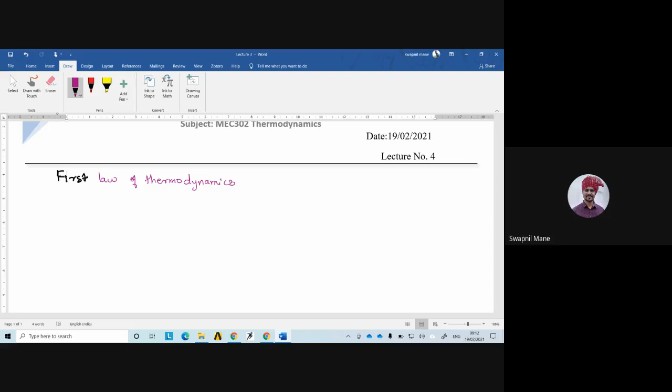So today's lecture outline will be to introduce the first law of thermodynamics. When we say first law of thermodynamics, it is applied to two systems. First is the closed system, and the other is the open system.

In order to understand the closed system and open system, we will first see what a closed system is. We discussed in the last class that a closed system will have a system boundary, and energy can go in, energy can go out, but mass cannot go in and out.

So mass in, mass. Sir, some students are waiting out. Okay, okay, 1 minute.

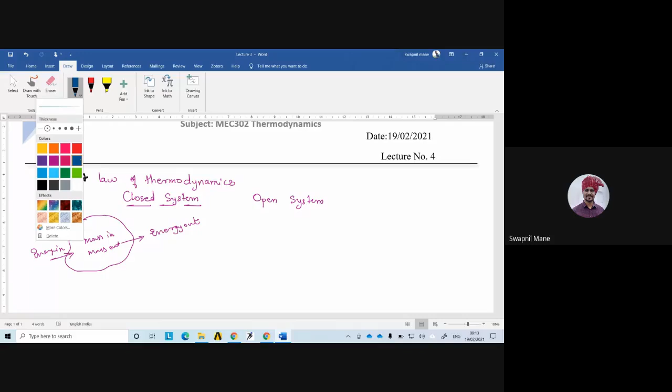So there is a restriction for mass in and mass out, and that is called a closed system, right? This was covered in the previous class. So what we will now do is first understand how the first law is applied to the non-flow system. You must understand a closed system is nothing but a non-flow system. What is a non-flow system, by the way?

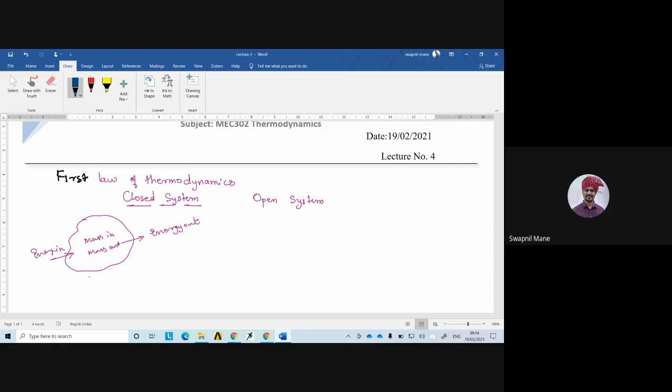A flow system means some fluid particle is going into the system, and the same amount of fluid will come out of the system. This is called an open system, or we can say flow system. So this happens for fluids.

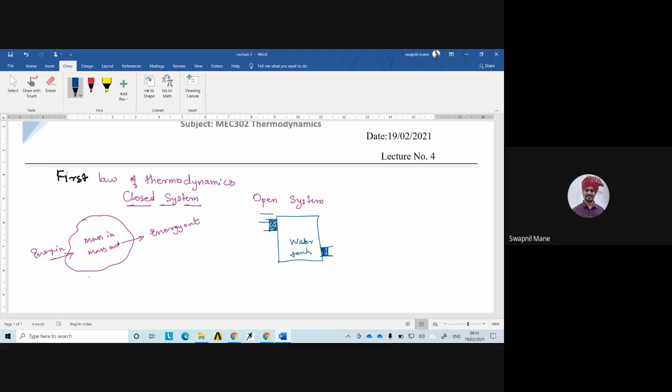So here the transaction of energy will take place, and of mass also. This is the mass particle going into the system, and the same amount of mass is going out of the system. It is the same example of a water tank, in which the fluid can go inside and outside; that will become an open system. But now we are talking about the first law applied to a closed system, or we can say non-flow system.

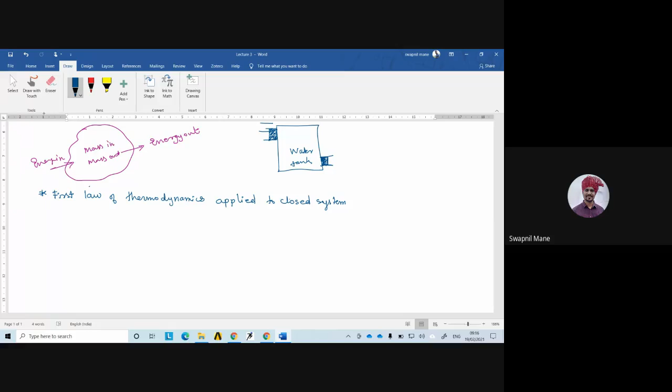So what the first law says is that the algebraic sum of heat transfer is the same as the algebraic sum of work transfer. But because it is undergoing a cycle, we can say that the algebraic sum of heat transfer in a cycle is equal to the algebraic sum of work transfer undergoing a cycle.

Or in other words, the cyclic integral of change in heat is equal to the cyclic integral of change in work. Please remember all these terms because these are very important in your entire lifetime. So this is the first law of thermodynamics applied to a closed system undergoing a cycle.

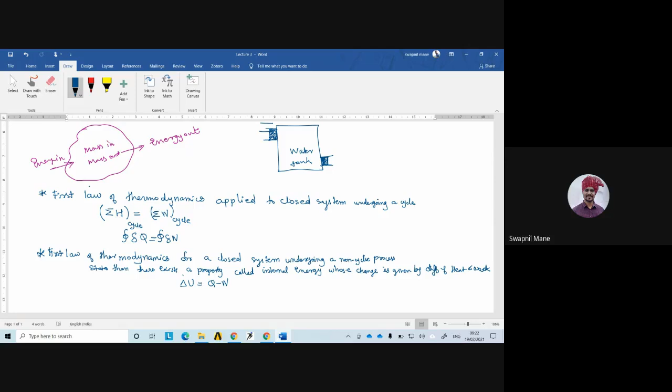Okay, this is clear. So if the first law is applied to a closed system for a non-cyclic process, then there is a property we call internal energy, whose change is given by the difference of heat and work. So just keep in mind that if it is a closed system undergoing a cycle, then the cyclic integral of heat is equal to the cyclic integral of work. And if it is not undergoing a cycle, then the change of internal energy is equal to Q minus W.

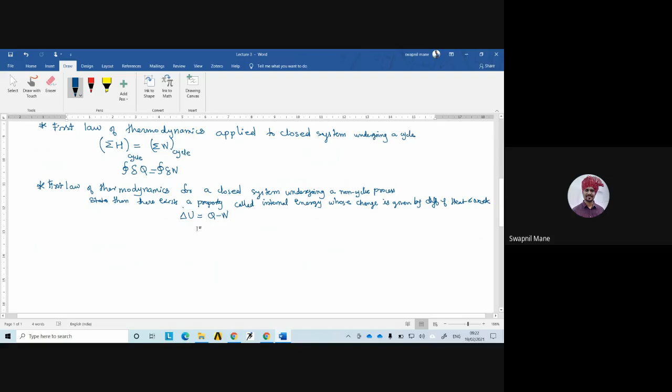So here this parameter will give you an overview of the answer to the question why providing heat will not make the wheel rotate. Why? Because this heat is getting converted to a change in internal energy. So the internal energy structure of the material will get changed, the property will get changed, and it will not result in any amount of work. You got the idea? Because it is not undergoing a cycle.

If I heat the water, its internal energy changes. Because of that, the molecules gain energy and convert into steam. But steam, if I condense, that means if I remove that internal energy, I can again get water. So that is a cyclic process. So if I keep some piston on that hot water, when the steam is generated, the piston will do some work. So heat is getting converted into work, and some change of internal energy will take place.

But if it is going on in a cycle, then we can get a negative amount of internal energy also, which is rejected, and then we can get back the heat from that steam. Means if I remove the heat from the steam, it will again get condensed. That is called a cyclic process. You understood this? Please say yes or no.

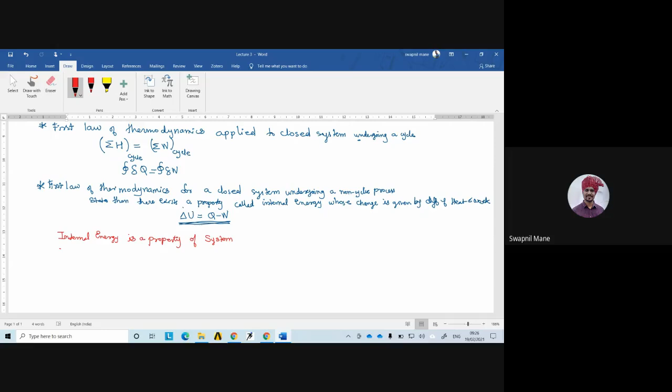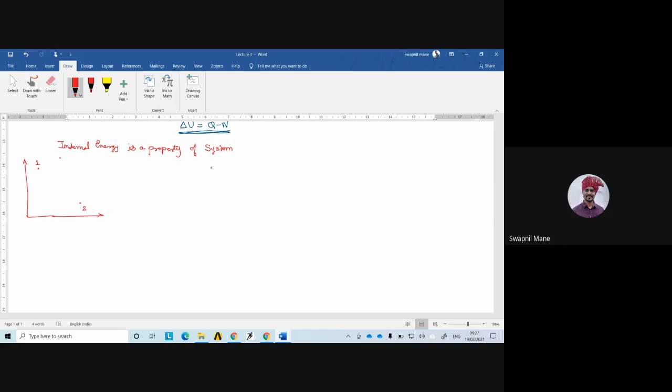Consider a system undergoing a change of state; it will have some path. Imagine we have a coordinate system defined by properties, which are ordinates that define the state of the system. Yes or no? Imagine the ordinates are defined by states 1 to 2 and it is undergoing a change of state. This is the path from 1 to 2. Let us call this path A.

Now, is 1 to 2 a cyclic process or non-cyclic process? Non-cyclic, sir. Correct, very good. Now, if it returns to the original position by a different path, path B, together path A and path B, is it a cyclic process? Cyclic. Very good. Why? Because initial and final states are same. So together A and B become a thermodynamic cyclic process.

So we can now write, let us consider, applying the first law of thermodynamics.

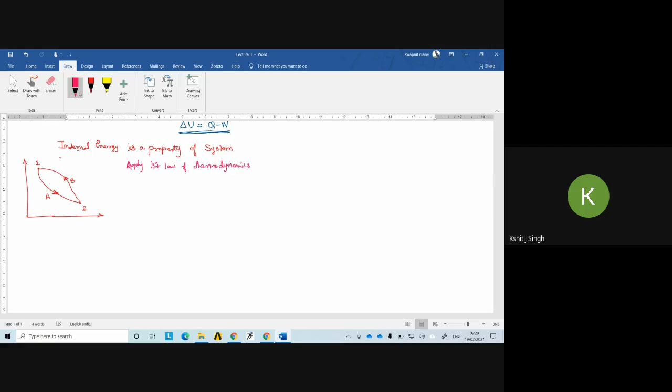Sir, students are waiting outside. Oh, they are joining too late actually.

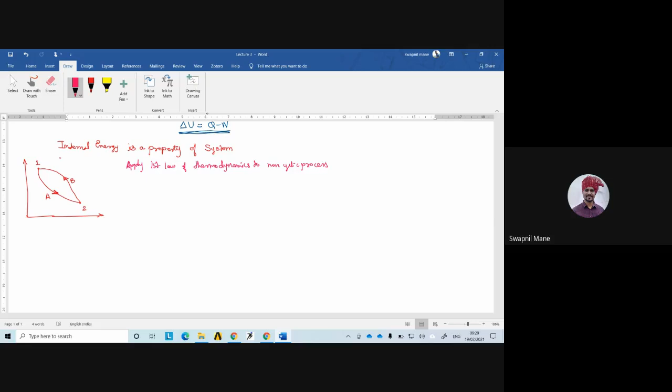Okay, so first apply the first law of thermodynamics to the non-cyclic process for path A. What will be the non-cyclic relation? Can anybody recall? Del U is equal to Q minus W. Correct. Change of internal energy of A is equal to Q of A minus W of A. Similarly for path B, change of internal energy of B is equal to Q of B minus W of B. Is it okay? Yes, sir.

Now, A and B together form a cycle. So the first law applied to a cycle: summation of Q for the cycle equals summation of work for the cycle. So Q of A plus Q of B equals WA plus WB. Rearranging, QA minus WA equals minus of QB minus WB. Yes or no? So del U of A is equal to minus del U of B.

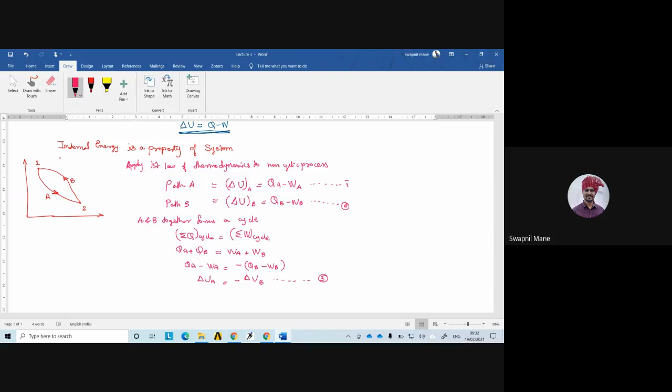Sir, why QA plus QB? A and B together form a cycle, right? When we apply the first law to a cycle, summation of all heat equals summation of all work. Now summation of all heat for this cycle will be heat supplied by A and heat supplied by B.

So it will be QA plus QB. Also summation of work means work done by A plus work done by B. And then we are rearranging the term: QA minus WA is equal to minus sign outside. So QB will go this side. So minus of QB minus WB, like that. Is it okay? Yes, sir. Is it okay?

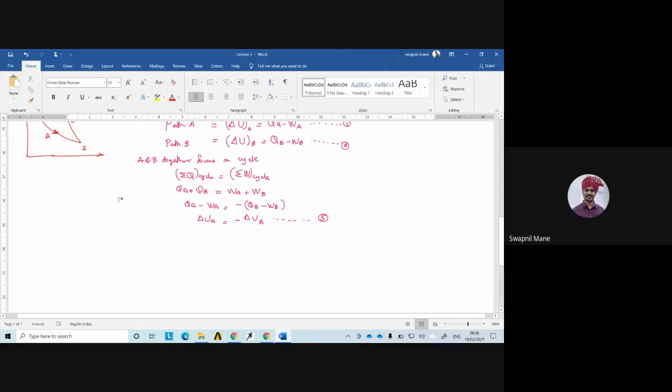Okay, so moving further, let us imagine that this is path A, this is path B. Now let us imagine that my path 1 to 2 is returned by another path, that is path C. So 1 to 2 is done by path A, it is returned by path B. We found this relation. If it is returned by path C, one minute, one minute.

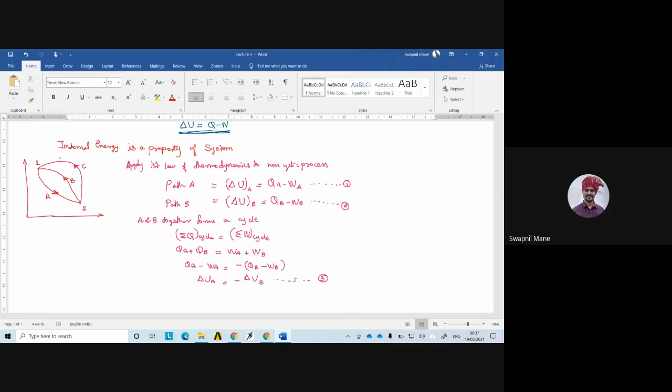Okay, so if it is returning by path C, then what will happen? Can anybody tell me what will be the expression if I do the similar thing, that A and C together form a cycle? Then summation of Q of the cycle will be equal to summation of W of the cycle, right? So QA plus QC will be equal to WA plus WC, isn't it? And what will be my final expression?

So we will write: if the system is allowed to return from state 2 to 1 by path C instead of B, then what will happen? Delta U of A will be equal to minus delta U of C, isn't it? Is it okay?

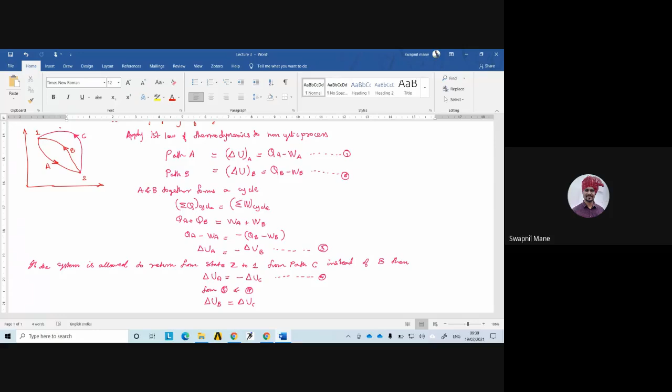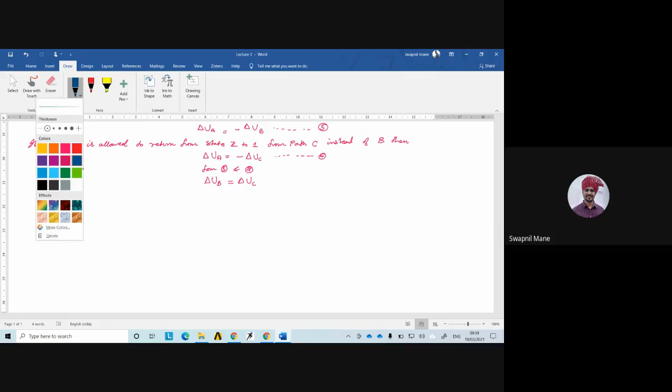Yes, sir. Then what can we predict now from 3 and 4? From 3 and 4, we can say delta U of B is equal to delta U of C. Okay. Then what does this show? This shows that the change of internal energy is independent of path.

Independent of path, and it depends upon only end states. So if a parameter depends upon only end states and is not dependent upon the path, it is called a point function. The property which depends upon only end conditions is called a point function, and that is why it is also a property of system.

Hence, it is a property of system. Right?

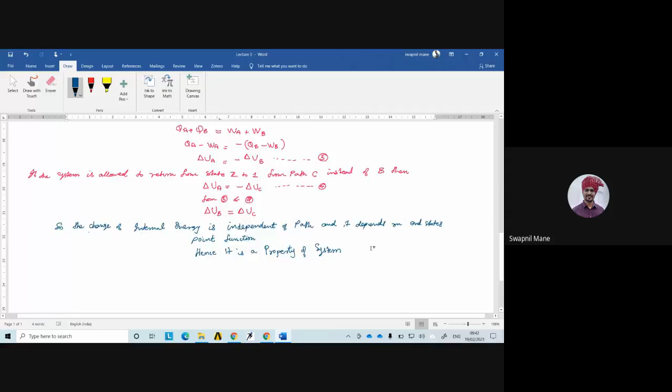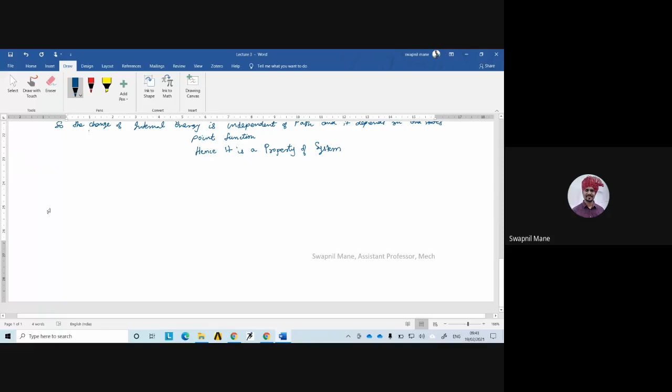Okay, so now what we will do is we will move further, and then we will start with the different thermodynamic properties, thermodynamic processes actually, for a non-flow system. So what is non-flow? Closed system. Is it okay?

In that, the first part will be constant volume process. It is also called isochoric process or isometric process. Right? In some books it is also called PV relations, or we can say PVT relations. So we will now start with this.

How to show the PV diagram for this? PV diagram means what? It is a P versus V diagram. Is it okay?

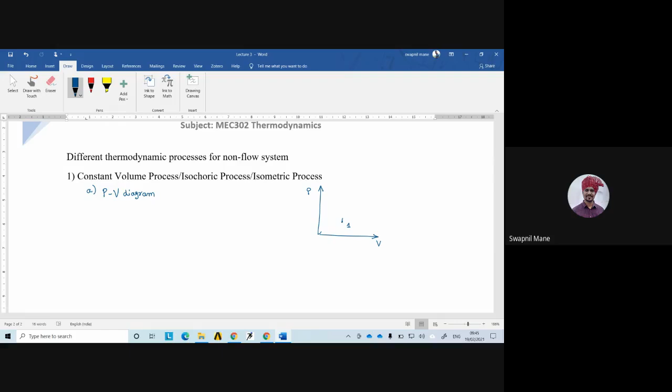So this first is the state of the system. So what will be the other state for a constant volume process? Will it be a horizontal line, vertical line, or inclined line? Sir, vertical line. Correct, vertical. So it is a vertical line, and this will be my point number 2. So this is constant volume process from 1 to 2.

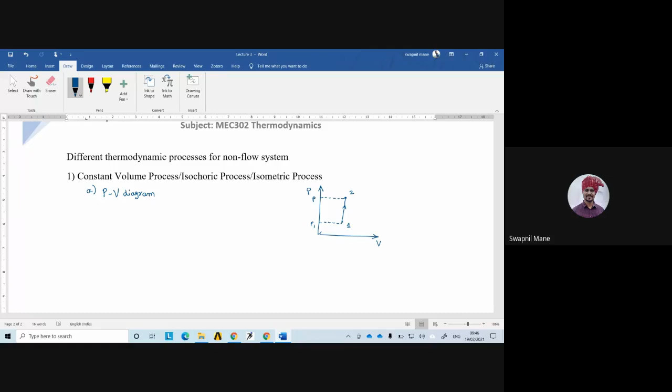So what is changing now in constant volume process? Volume will remain same because it is constant volume. So only pressure will change from P1 to P2. Yes or no? Yes, sir.

Right, now part B. What is the PVT relation? You know that universally we write P1V1 by T1 is equal to P2V2 by T2. Yes or no? So if the volume is same, V1 and V2 are same, then we can write P1 by T1 is equal to P2 by T2.

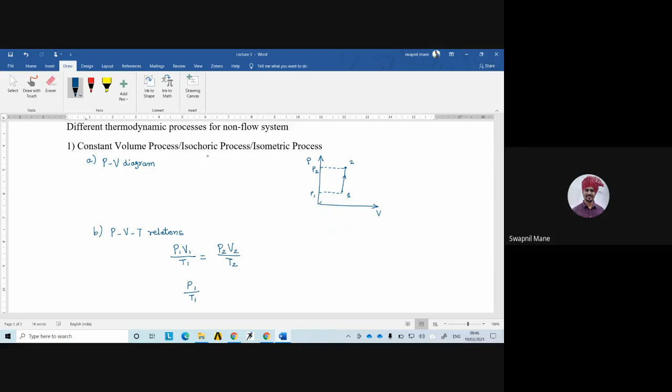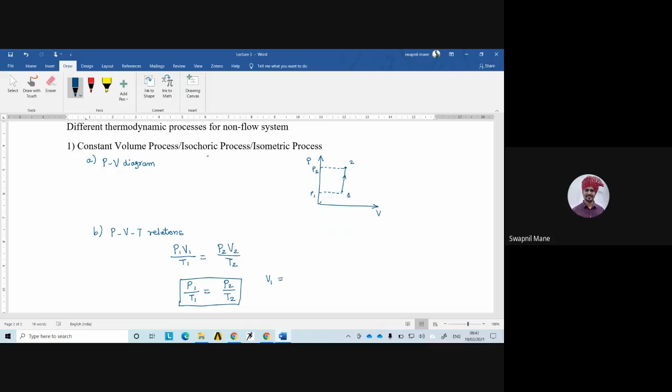Yes or no? So if there is a constant volume process, then we get this relation: P1 by T1 is equal to P2 by T2. Isn't it? Are you getting the idea? Yes, sir. Yeah, this is very simple.

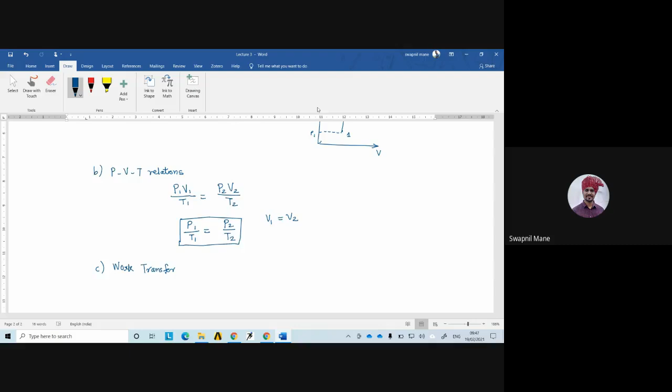Already you have done this. C part, work transfer. On this, small numericals will be asked, so you should be ready for that. If the process will be given, not just one process, but it will be.

So if it is a closed system, what is the thing that is not changing? Volume is not changing, right? So for work transfer, work done from 1 to 2 will be equal to the integral from 1 to 2 of P dV work. Yes or no? Why P dV work?

Because when we say that if we have a container like this and we have a volume inside this, if I heat this, that means I am putting heat transfer into it. What will happen? Volume is remaining fixed. Whether the piston placed on this water will move or it will not move.

It will not move because it is a constant volume process. Volume is not changing, only pressure is changing. So if pressure is changing and volume is not changing, there will be no work done. Work will only be done when there is a displacement, and displacement will only occur when the volume changes. So here, as dV is equal to 0, we can say there is no work done. Work transfer is 0.

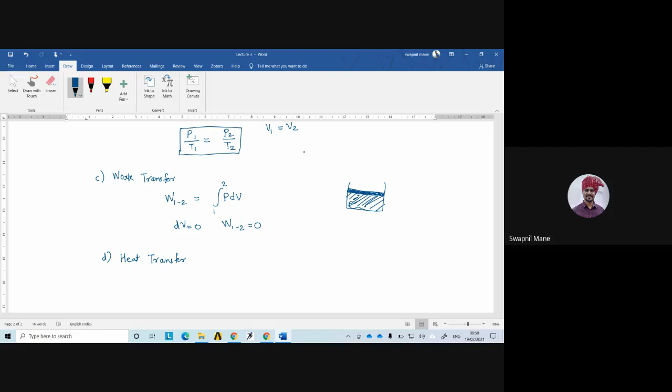Sorry sir, didn't get your question. The question is: constant volume process, is it a cyclic process or a non-cyclic process? Sir, non-cyclic. Correct, because if I apply any energy to this system, it will not come back to its original point. Yes or no?

It is a non-cyclic process, and for a non-cyclic process, I apply the first law of thermodynamics as delta U equal to Q minus W. But what is Q? Here we can find out Q1 to 2. Q1 to 2 will be equal to delta U1 to 2, because W is equal to 0.

And that is why Q1 to 2 will be equal to delta U, given by M Cp... no, here it will come Cv because it is a constant volume process, not Cp. So it will be M Cv, and the change of temperature, that is T2 minus T1.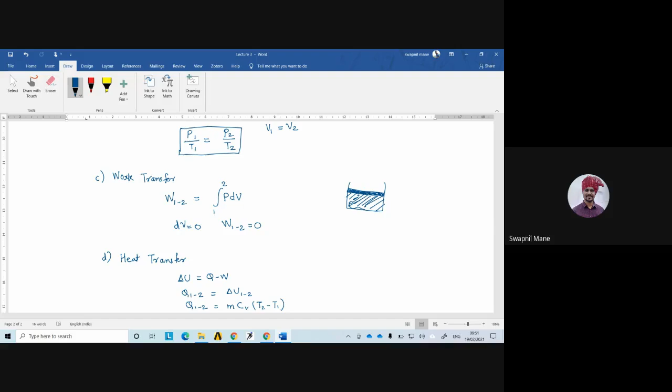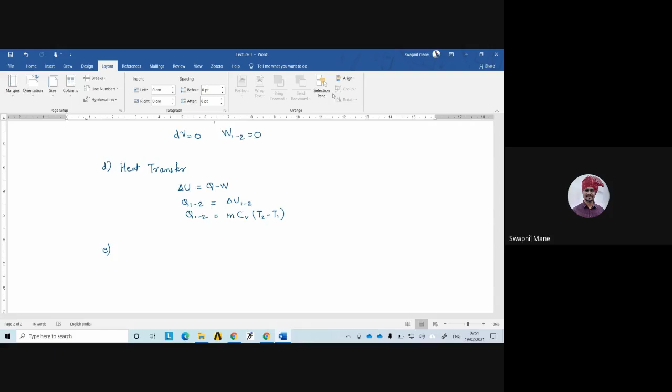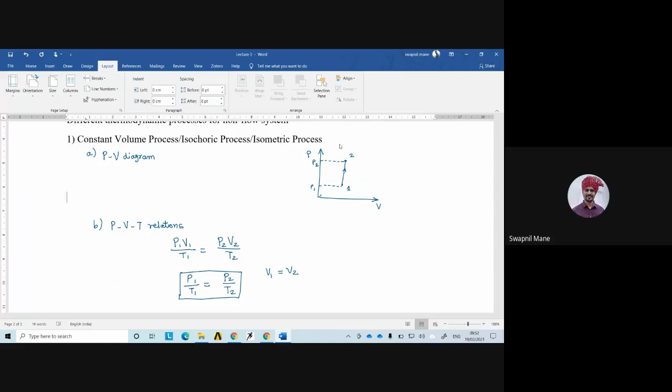So this is okay. Then the E part. For all the processes, we tend to find the PV diagram, PVT relations, work transfer, and heat transfer. Heat transfer here will be delta U, that is the change in internal energy. Change in internal energy can be given by definition: delta U will be equal to M Cv into T2 minus T1.

Then F part, delta H, that is change in enthalpy. Change in enthalpy is given by H2 minus H1. By definition, what is the definition of H? For understanding the definition of H, just let me tell you one thing, just remember this.

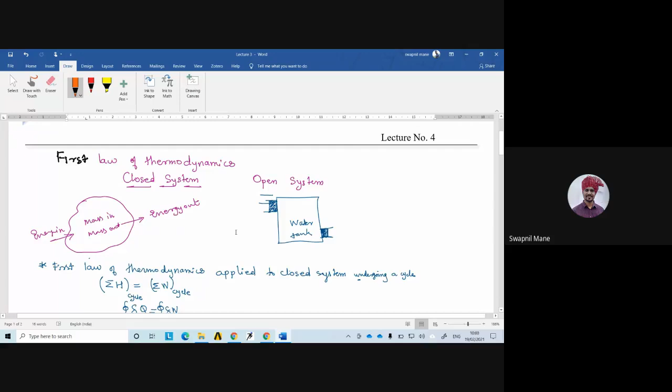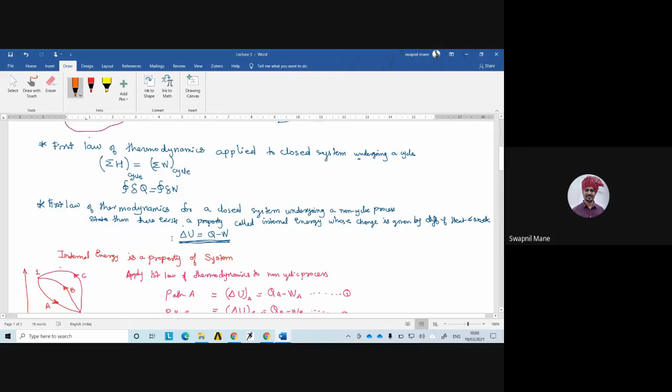Okay, so we will summarize what we have done today. We have introduced the first law of thermodynamics for closed system and open system. For a closed system undergoing a cycle, cyclic integral of Q equals cyclic integral of W. If it is undergoing a non-cyclic process, then delta U, the change of internal energy, equals heat energy minus work energy.

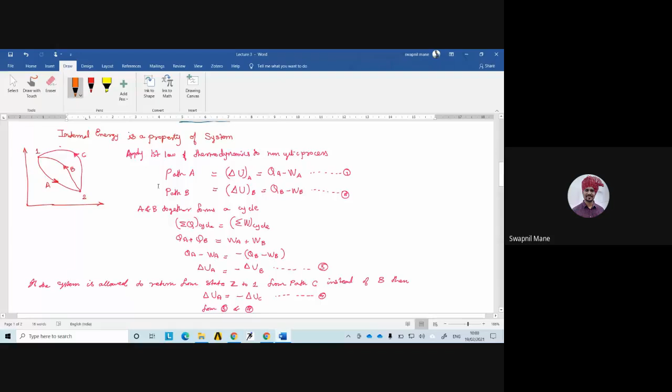Then we talked about what internal energy is. Internal energy is a property of the system because it is independent of the path; it depends only on end states. Then we introduced what enthalpy is. Enthalpy is similar to internal energy, but it is the sum of internal energy plus flow work.

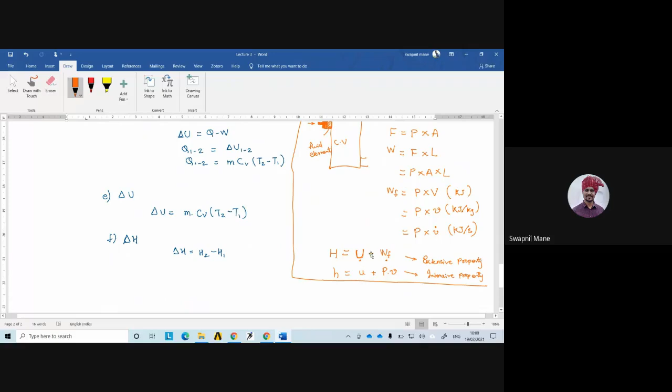If this is flow work, what will be the other type of work? One is flow work, the other will be - anybody? Shaft work. Work can also be defined as flow work, denoted WF, or as shaft work. Shaft work means what? Is any fluid material flowing? No, but still there is work, yes or no?

Right, so this other part is shaft work. Whenever we see a fan rotating, what kind of work is it? Shaft work. Water flowing from a tank, what type of work? Flow work. Wind turbine, what type of work? Shaft work. Because of air it is flow work, and because of the fan rotating it is shaft work. So flow work gets converted into shaft work, and there is no transfer of heat, yes or no?

Right, so with this we will stop. You try to look around in your surroundings, whether I will be able to define this heat energy into internal energy and enthalpy, and work energy into shaft work and flow work. That is your activity - throughout the entire day, try to find out whether this heat energy is a form of internal energy or enthalpy, and whether work is a form of flow work or shaft work. Will you do it? And if you find out, you can post it in our official group.